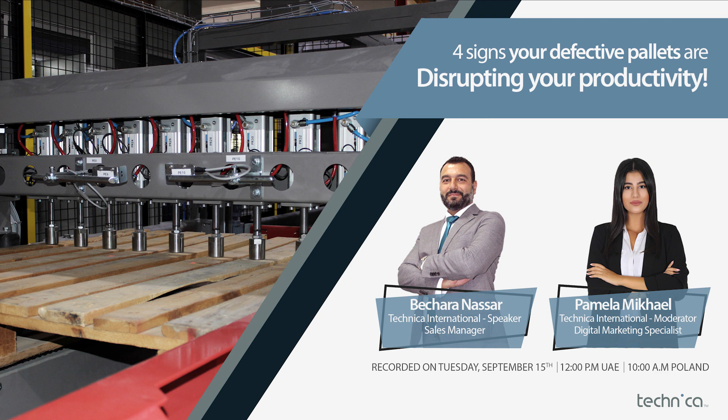Today, we will talk about the importance of maintaining healthy pallets.

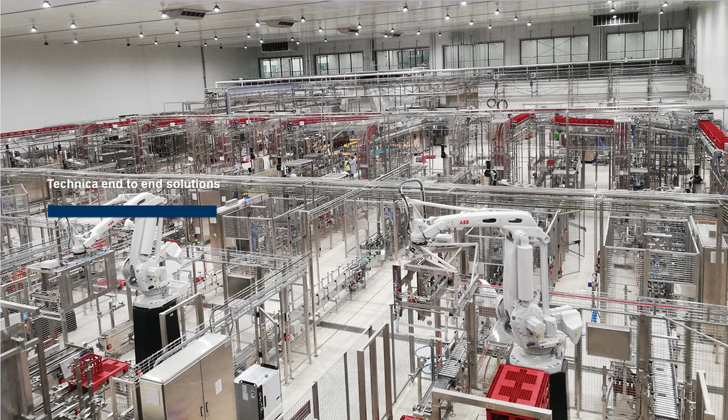Throughout the years, Technica has developed its expertise by providing complete end-to-end solutions, also for greenfield plants. This picture shows a complete dairy plant supplied from A to Z by Technica. So Technica is famous and built its expertise to provide complete end-to-end solutions.

Especially for bottling lines, canning lines, starting from empty container handling up to truck loading, passing through all the equipment on the line. Most of the equipment you can see on the screen are designed, supplied, and manufactured by Technica. Also, we have our partners to complement our complete integrations for empty bottle handling, for filling, decoration, sleeving, robotics, and end-of-line equipment.

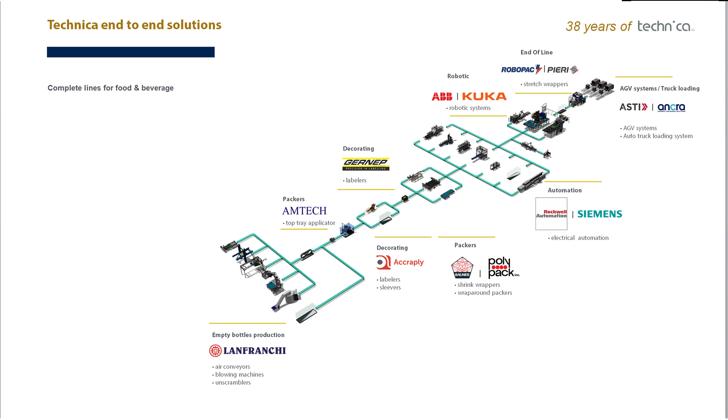Also, we work in the water industry for the big bottles, where we can also provide complete bottling lines, starting with robotic rack unloading, then washing and filling of the bottles, washing and cleaning of the racks, and at the end, automatically loading of the full bottles in the cleaned racks.

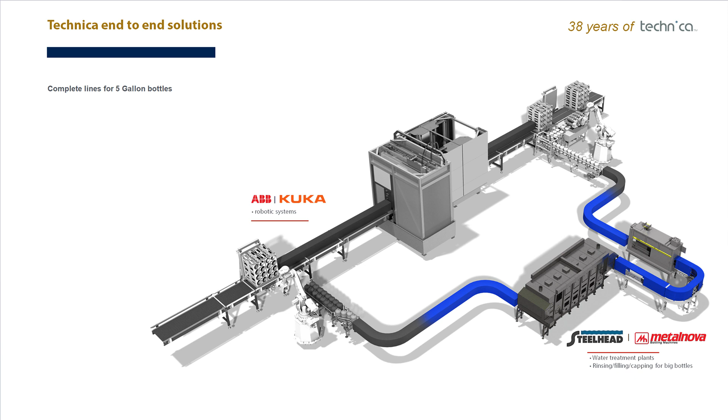On the side of mechanical and automation, Technica has developed its digital division, where we can provide solutions related to SCADA, Internet of Things, and all types of connectivity of equipment, complying with Industry 4.0 and smart factories.

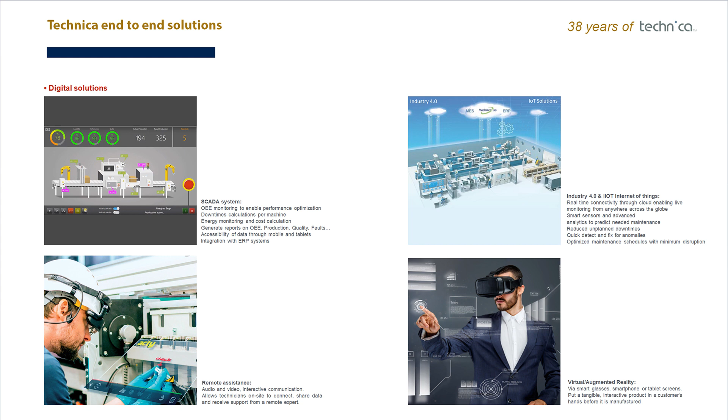Also, we developed our remote assistance services, especially with the last pandemic, where it was essential to keep close to our customers. We have more than 15 successful interventions where we remotely installed, commissioned, and troubleshooted equipment with our customers. It was essential to keep that relation even with the travel ban and all the restrictions.

On the side of all the solutions that we saw, Technica also has its innovation and R&D section, where we always develop special equipment suitable to improve efficiency, reduce labor, and at the end, keep the customers happy by serving their need and solving their challenges.

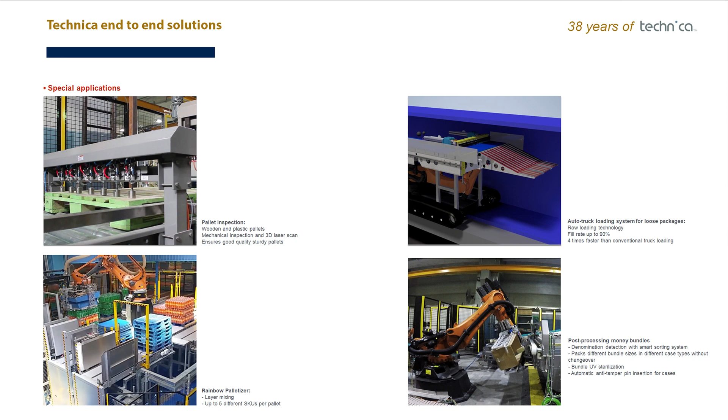We have automatic truck loading solutions for single cases, for loading and unloading, and it's a patent for Technica on a global level. We have a pallet inspection system. We have mixed palletizing solutions, and also some solutions related to money handling and banknotes, and also many other innovative solutions that we developed, customized based on our customer needs.

This is in general what we do in Technica. Hopefully, we can keep supporting you anytime you want. Our team is always ready. Get in touch with us and we will be happy to serve you.

Back to today's webinar and topic, it's mainly about pallet integrity and quality. So usually the customers facing problems, they can detect 4 signs in their operations that highlight that they have problems related to their pallet quality.

Following up on your introduction, Bechara, I will launch my first poll. Which of these signs sounds familiar to you? Frequent downtime on your pallet line, bad stability during transport, damaged goods, or frequent downtime on your automatic storage and retrieval system.

Some of the participants are voting for damaged goods, others are saying frequent downtime on your pallet line. Mr. Nassar, what do you think the majority will say? I believe it's bad stability of the pallets during transport. And I think it's actually confusing because all of them are familiar problems.

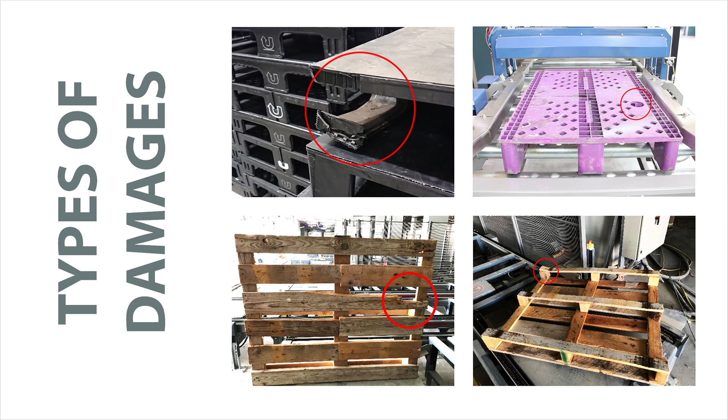Usually there are also two types of pallets. Some customers use plastic pallets, some others use wood pallets. For plastic pallets, you can have a missing corner block or damaged corner block. Also, you can have a damaged surface or missing part on the surface.

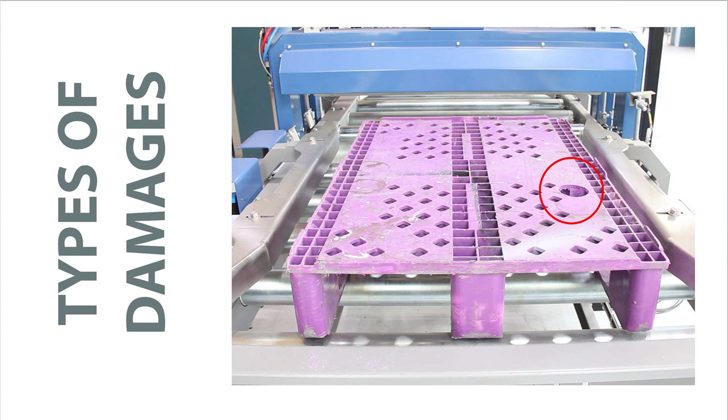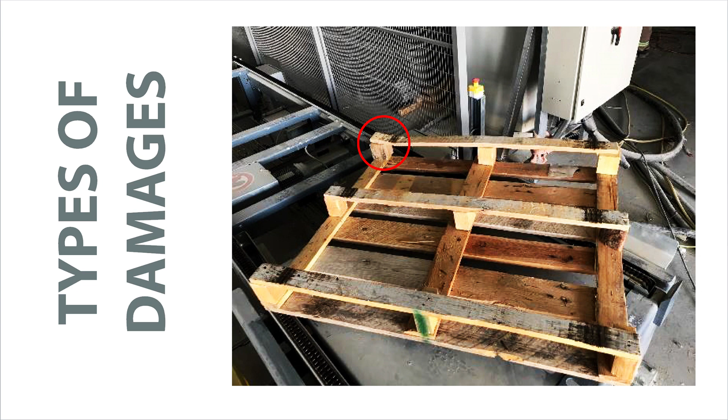On the wood side, it could be a missing top plank or a damaged top plank. It could be also a missing block or damaged block, the same for the runners. So all these are problems related to pallets that the customers usually have in their operations.

And it's common among all the industries. It's not related to a certain sector or to a certain type of work. Everybody working with pallets usually has this problem. So in order to identify those problems and reduce the headache and hassle on the customer side to sort and segregate those pallets, Technica has developed an automatic system for inspection of pallets to reject the bad quality pallets and keep the good quality pallets.

Bechara, allow me to take this chance and ask about the type of pallets our attendees are using. I will launch my second poll. Which type of pallets do you use in your facility? Plastic, wooden, or both?

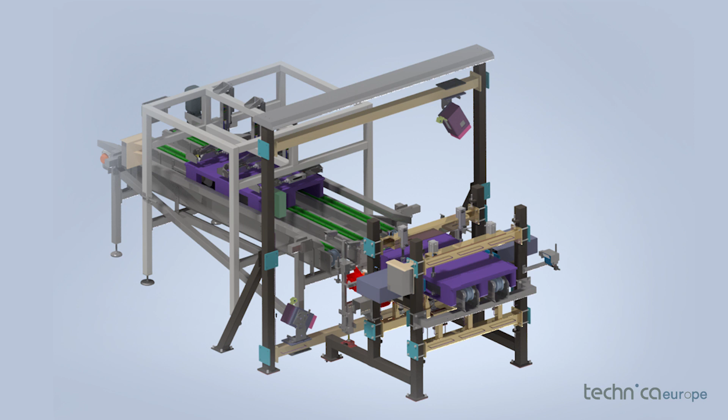So we can now show you a 3D model of the plastic pallet inspection. Here you can see a complete footprint of the pallet inspection by itself. It consists mainly of vision inspection and some mechanical inspection. However, for the wood pallet inspection, it is mainly mechanical with some visual inspection or vision inspection.

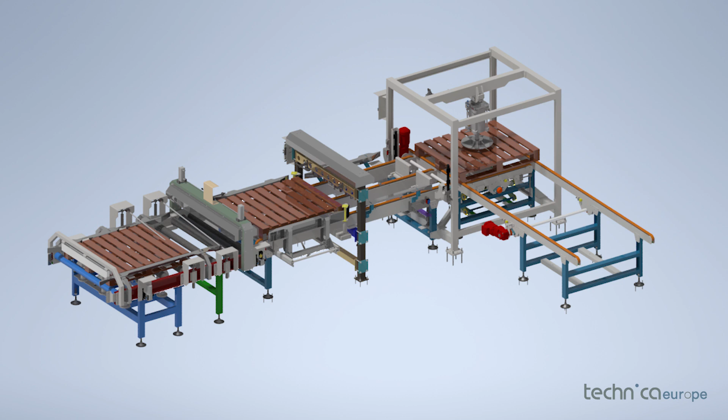So there are common parts or common criteria that can be inspected on both pallets, but each type of pallet has its own preferences and its own special criteria. We will show you a video for the plastic inspection unit. We can go through all the inspection criteria, and after that, we will also comment on the wood pallet inspection and see the common parts, and we see the advantages and differences in both.

So for the plastic pallet inspection, as I mentioned earlier, it is mainly a vision system. It can detect overall dimensions of the pallet, any missing part on the top side, any damaged runner or blocks on the middle or on the side. And also some pallets have some side rib to keep the product in between and can also be inspected.

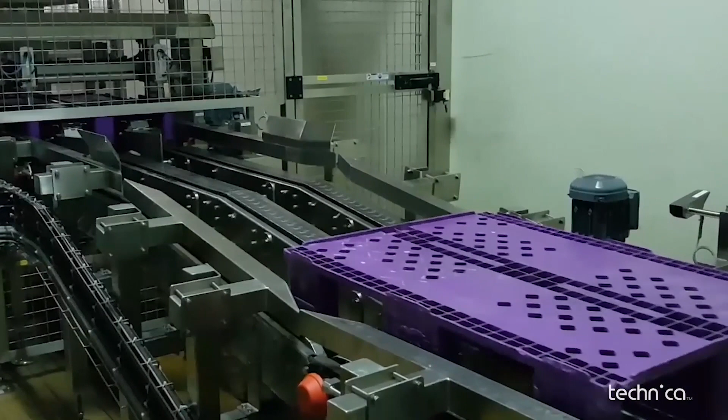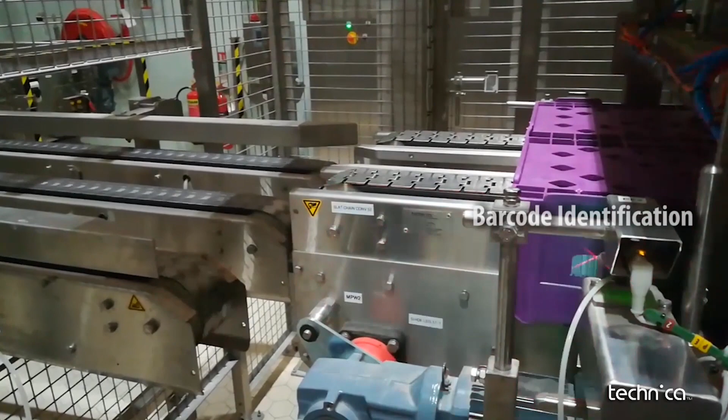At the first station, the pallet will be inspected with mechanical 4 pistons on the corners because the corners are having the most defects due to forklift handling. Also, some pallets have some identification like barcode or RFID. We also check the quality of that tag.

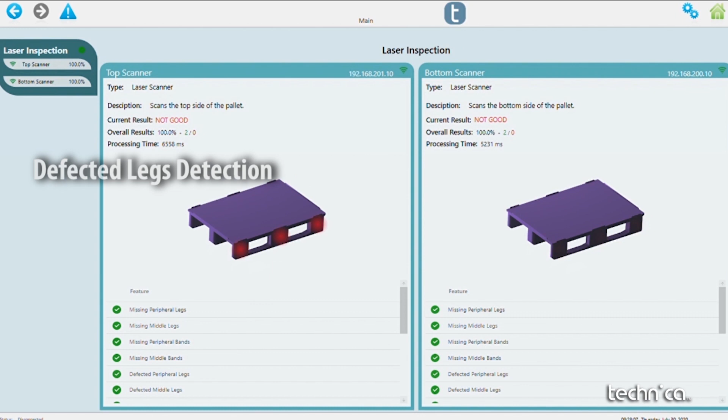And the next station will be this laser beam that generates a 3D model of the actual pallet and compares it to a theoretical good pallet. Here are the images that can be detected and highlighted in red, the damages. So we can have damages on the corners, on the runners, on the surface. So we compare, it's an image comparison between the actual pallet and the theoretical good pallet.

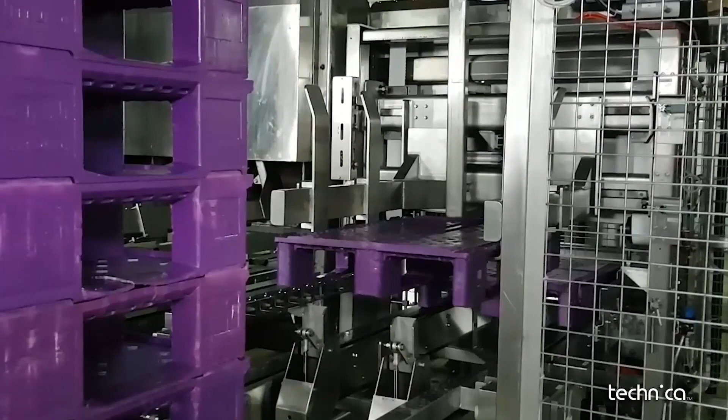After that, we go to the side rib inspection system where we check the existence and the distance of the side ribs. If the pallet succeeded to pass through all the criteria successfully, it will go to the distribution line and to the production line. If it is rejected, then it will go to be stacked and go to maintenance, repair, or to be scrapped. So this system can be in stainless steel, can be in painted steel, can be offline, can be online. It always depends on the customer requirement, the layout, the availability, and the requirements.

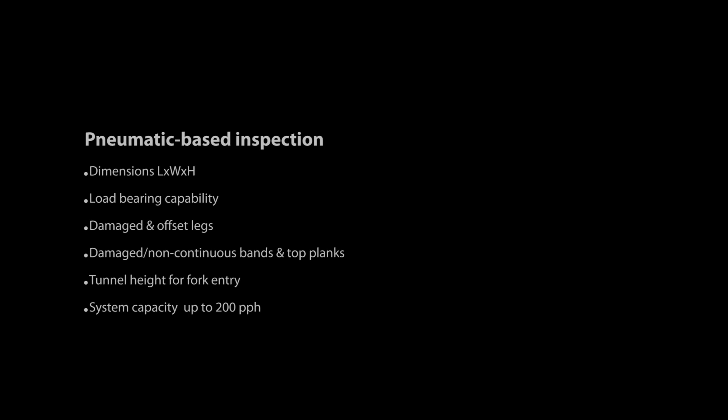The second video, it will be about wood pallet inspection. For the wood pallet, we always intend to check the overall dimensions of the pallet. Mainly, most of the inspection systems will be mechanical and some are vision. So overall dimensions, the ability of the pallet to withstand a real load, any damage on the top planks, runners, blocks, or nails. This is a video for an offline pallet inspection system with a capacity up to 200 pallets per hour.

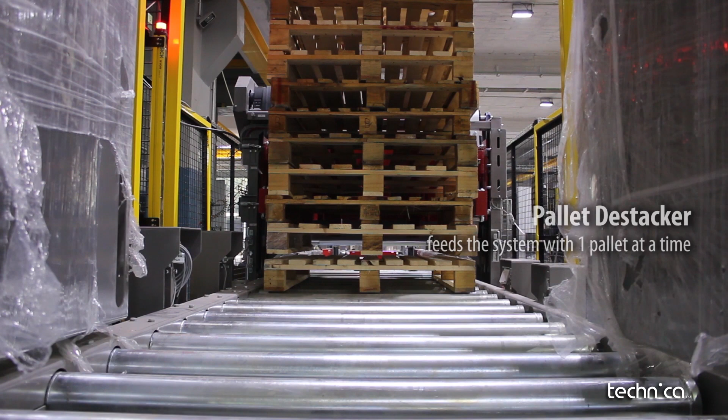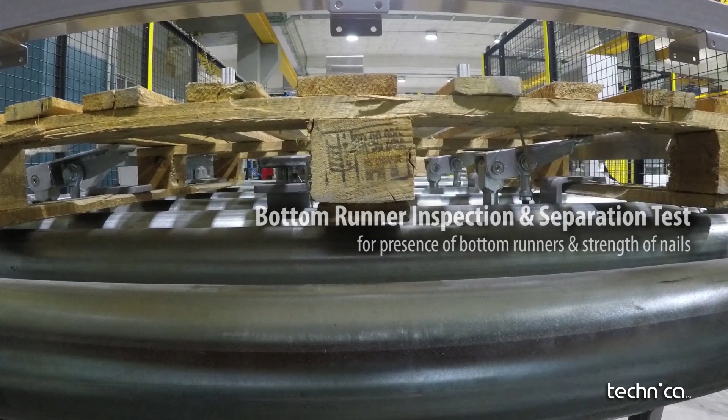The forklift will place a stack of pallets on the line. Then we destack the pallets one by one to be inspected individually. This is a modular inspection unit, so we can add or remove units.

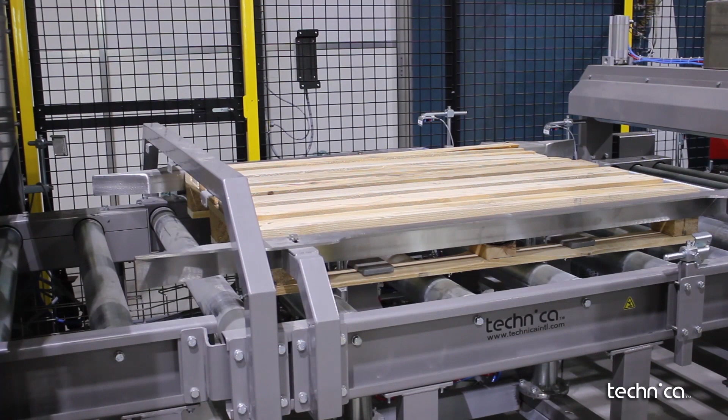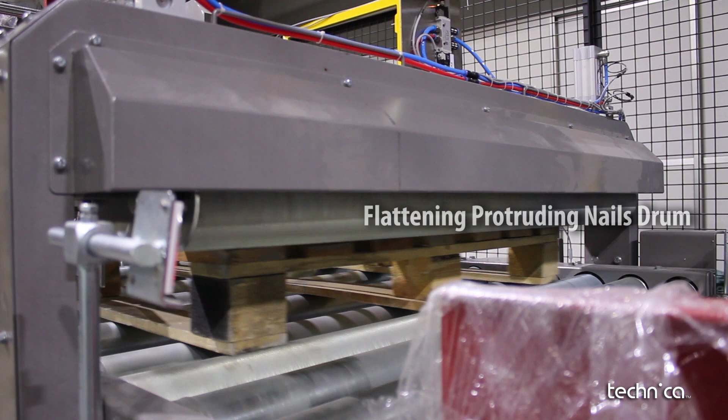At the first station here, we can see that we try to take the pallet apart. We separate the top planks from the runners. This is to check the quality and stiffness of the nails and to check the existence of the runners. After that, we apply a top force by a pressing roller to restore the pallet in its original shape and at the same time to flatten any protruding nail that can damage the product.

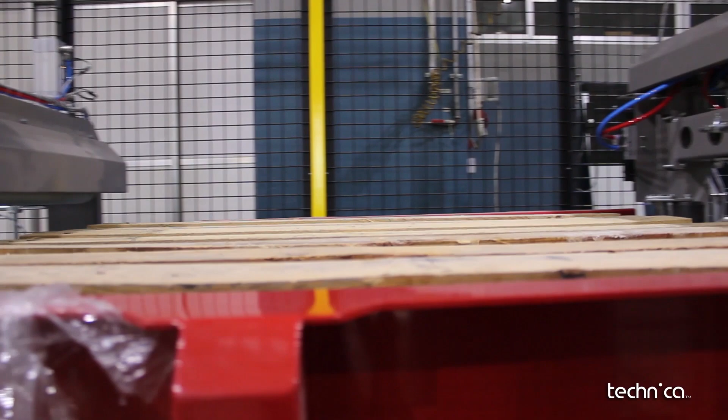The next station will be to check the quality of the top planks. So we center the pallets and we have individual check for each top plank. We check its rigidity and we check its presence. And at the same time, we have pistons to check the lateral planks.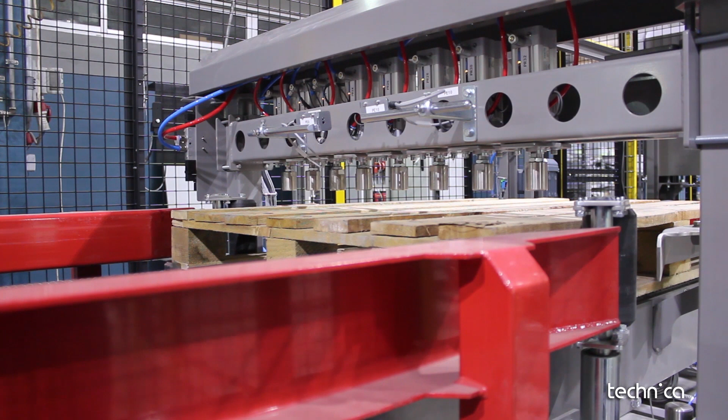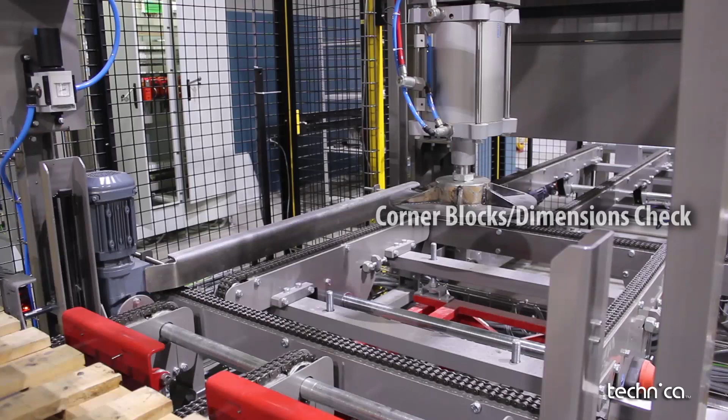After that, we will go through a vision system that will check the overall dimensions, length, width, height of the pallet, and also it will take measurements of the corner blocks and mid blocks and the distance in between, so we can make sure that the opening for the forklift is also within the same tolerance required.

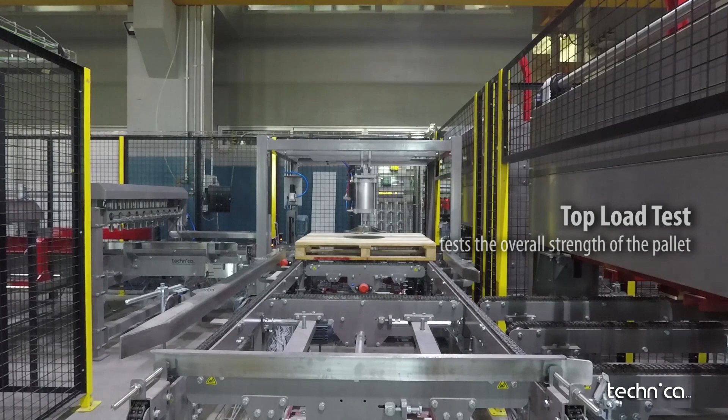The last station will be applying a force or simulating a real load, resulting in a certain deviation on the pallet. The pallet is also supported only on two sides. It's also to simulate the real pallets staying on the racking system. And based on the deviation level or deflection level of the pallet, we decide if it will be a good pallet or a defective pallet.

If a pallet succeeded to pass all these criteria successfully, then it will go to the good pallet line. Otherwise, it will be rejected.

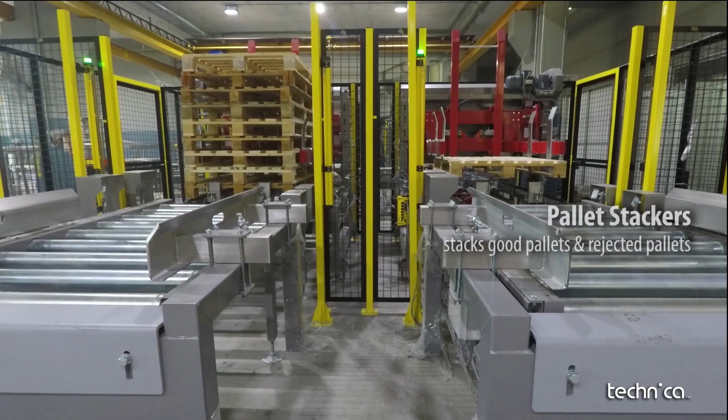With this offline system, the operator will bring a stack of empty pallets coming from the market or from the supplier. And at the end, it will be collected as a stack of good pallets or a stack of rejected pallets. The good pallets will be distributed to the production lines, while the rejected pallets will go to repair or also to be scrapped.

Thank you, Bshara. Since this video of the wooden pallet inspection system was installed at Mai Dubai, I would like to ask a few questions to Mr. Osman. Before Technica installed the wooden pallet inspection system at your facility, what were the problems faced that triggered a need for this specific solution?

As you might know, in the beverage industry, people ship their full goods to the market in wooden pallets, we call them shipping pallets. The market is such a big market, different customers, supermarkets and hypermarkets. You don't get back the same pallets you gave them. They give you some pallets which are non-standard, maybe of poor quality. Even though you maintain good quality in your pallets, by evening you'll get bad pallets back. You cannot get one-to-one the same pallet you gave to the market. This is the market dynamics.

Due to this, and also due to forklift movement, internal movements, and customers handling them badly, these wooden pallets get damaged. When they enter the system, we used to get them back and do manual inspection before Technica installed the pallet checker. Manual inspection to a certain extent is fine, but bad pallets could still get into the system. Those pallets were creating 3 to 5% downtime in our production lines and automation systems, which is quite huge for a 24/7 running factory producing around 1,200 pallet goods in a day.